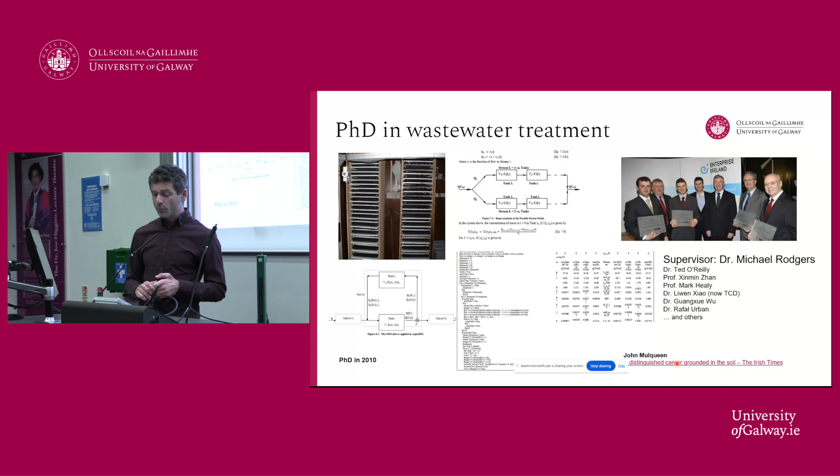I'd also like to mention John Mulqueen, who worked with us in the lab, had a long research career with Michael, and was also a brilliant person. So I was really lucky in this group. He died a number of years ago, but was a soil scientist with a vast international career.

Okay, so I'm skipping ahead a few years to university life. I suppose the question is, why water, wastewater and sanitation - why is it an area of interest? To be honest, all engineering is of interest to me, but currently as of 2022, the most recent data, there's just over 2.2 billion people who don't have safely managed water. Far more people have access to mobile phones and the internet than have access to clean water, which is astonishing. And 3.5 billion people lack safely managed sanitation around the world.

And it's not just in developing countries, it's in developed countries as well. It's the leading cause of death for children under the age of 5, and the leading cause of malnutrition for children under the age of 5 - lack of sanitation facilities.

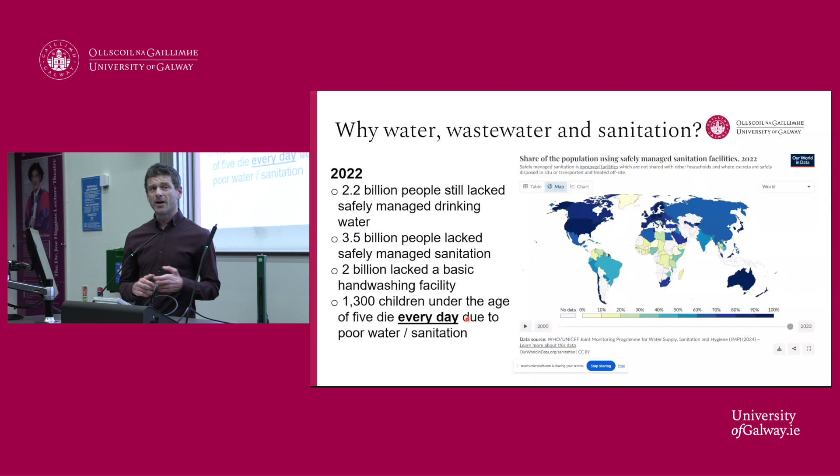So for me, it's always been an area of interest, and even in developed countries there are significant problems with water and wastewater treatment - problems such as the costs of maintaining the infrastructure, the energy consumption that goes with trying to treat wastewater and water, which I think a lot of society are not really aware of.

The types of contaminants that have to be removed - basically everything that goes down the sink and down the toilet has to be somehow taken out of the wastewater treatment plant. That includes cosmetics, pharmaceuticals, all the other products that end up in the system.

Wastewater infrastructure is now challenged by climate. Additional rainfall gets into the wastewater treatment plants, which could have significant impacts, and there's lots of other areas.

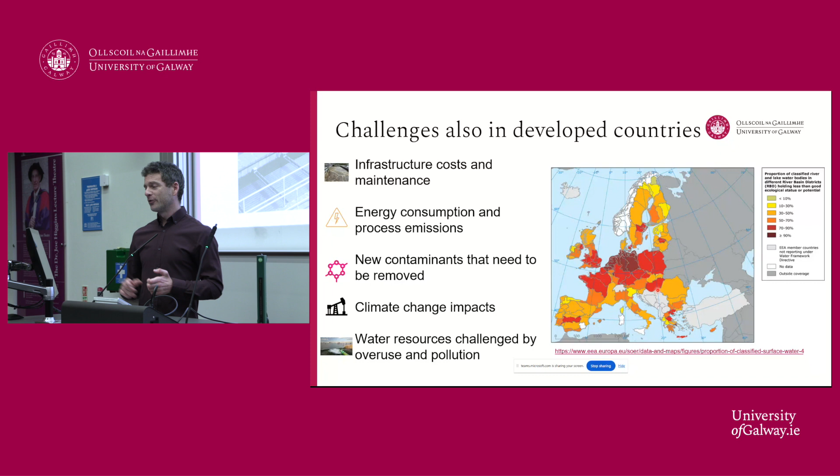I was quite lucky - the head of Irish Water did me a favour last week by coming out with a pretty bold statement saying that the system in Ireland is in a desperate state. I don't know if anyone read that, but it was pretty critical, I felt, of the government in terms of their approach, and maybe of society in general, to water infrastructure. So it was quite lucky for me to have this presentation, but I can see why they might think that.

So that's kind of the context. The two areas that I'm going to focus on, with a few detours along the way, are aeration and process control. I'll describe these very briefly, not going into technical detail in this talk, but they're the two core themes that our research has focused on over the last number of years.

So aeration, it's quite a simple thing actually. In order to drive wastewater treatment, we need to get air into the water. The air enables the bacteria we use for wastewater treatment to carry out various reactions, and those reactions are what we use to remove a lot of the contaminants from wastewater. So it's really the key driver in wastewater treatment, but it's also the key energy consumer, and it's the key component we use to try and control how well the treatment process works.

There are different technologies we can use, such as surface aeration. It's nice engineering technology, I think, because it's really simple. It just comprises sloshing the water around the place to create turbulence, which helps air get in. It's very robust, actually quite efficient, but very robust, doesn't break down.

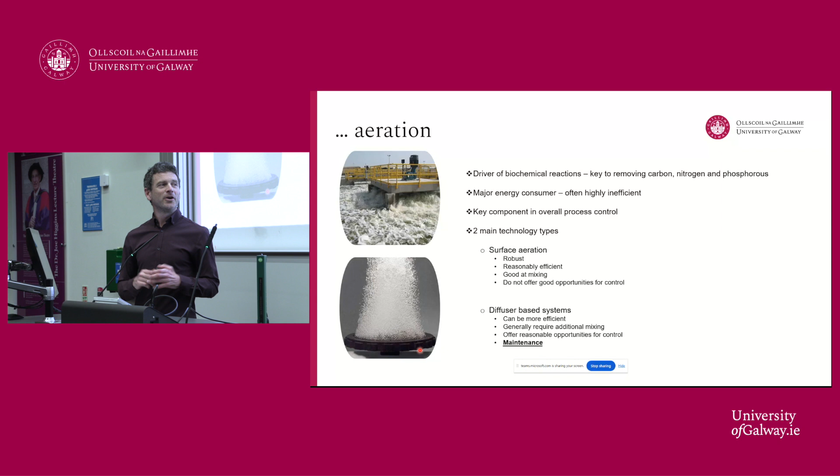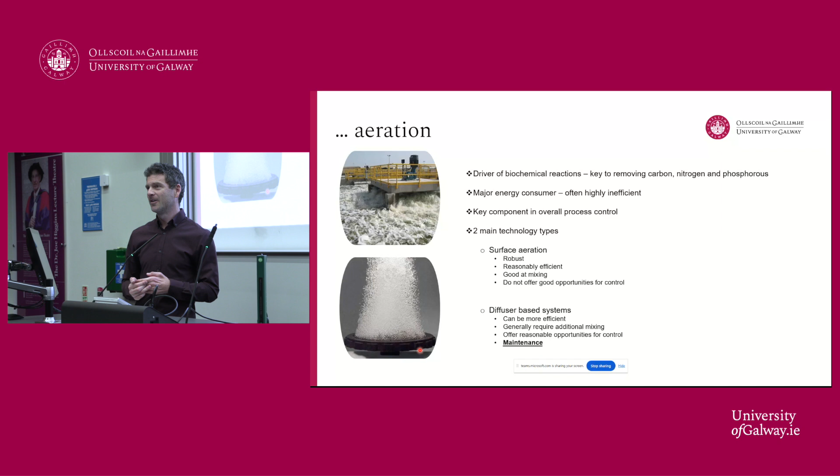Maintenance of these is a major problem, because most people haven't seen a wastewater treatment plant, but a tank would easily be the size of this room, or multiples of that. If you have diffusers on the floor at the bottom of the tank and they start getting clogged, how do you maintain them? What do you do with the millions and millions of litres of wastewater already in the tank? There's wastewater coming into the system all the time, you just can't tell the city to stop producing wastewater. So the maintenance of these devices is a major problem.

The other problem we try to tackle is this kind of performance gap. These technologies work very well when applied to clean water, but because of different chemicals, including household detergents that we put into wastewater, these technologies tend to perform much more poorly in wastewater when compared to clean water. That makes them less efficient and causes us to spend more money on aeration and other issues.

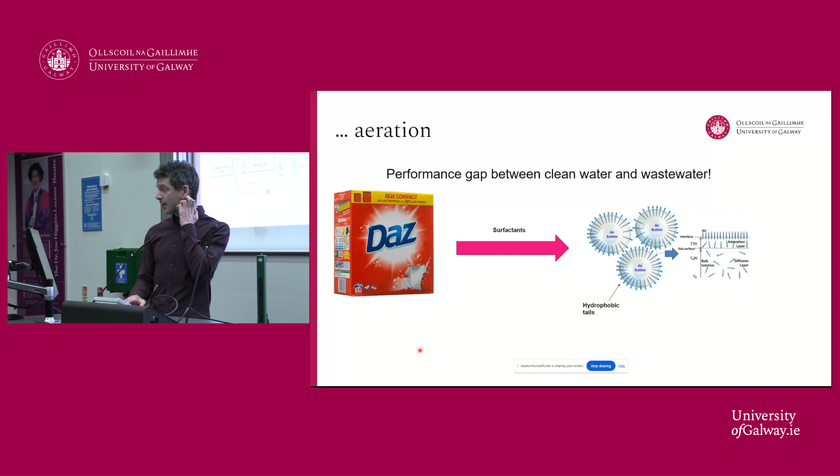So that's the first area, aeration. The second bit is process control - how do we control the overall wastewater treatment process so that we meet the discharge limit.

Every wastewater treatment plant has to meet a discharge limit, a regulatory limit, which in Ireland is monitored by the Environmental Protection Agency. It has to be as efficient cost-wise as possible, because while Irish Water are complaining they don't have enough money, so is every utility around the world, so they have to try and drive down costs.

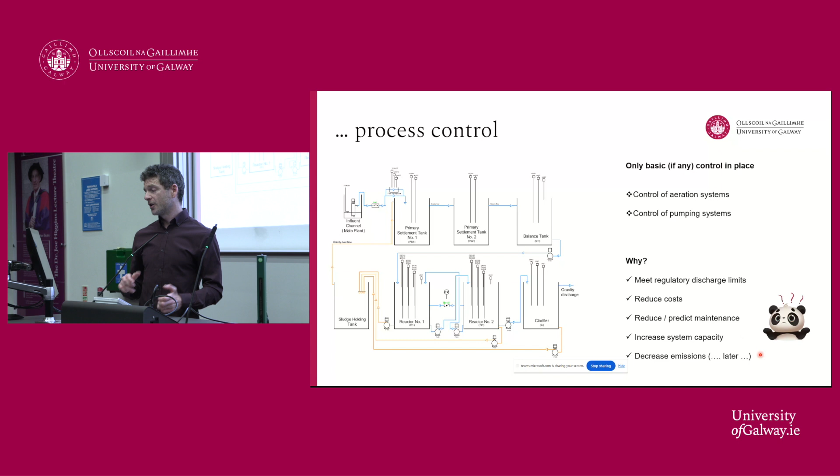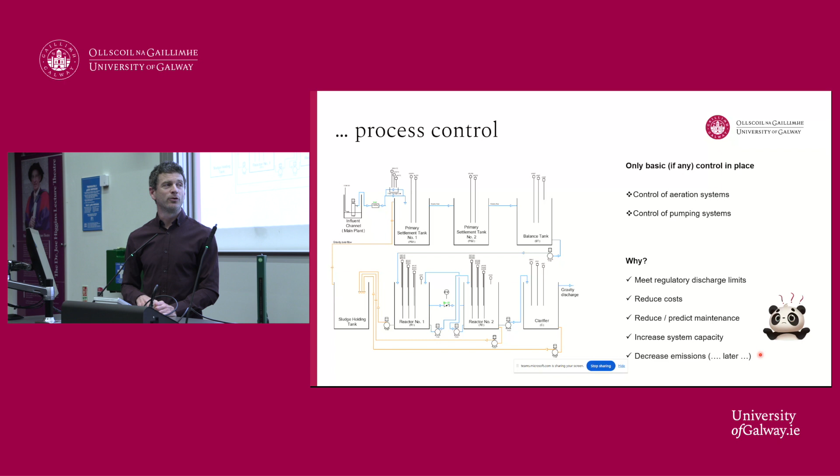These types of control systems can try to reduce or predict maintenance so the plant doesn't break down, allowing maintenance before a system breaks down completely. They can be used to increase system capacity within the same volume or infrastructure footprint. And later, we'll see how we can use process control to try and reduce gaseous emissions from treatment plants. So these are the two main areas I'll run through, with some detours into other research projects along the way.

Okay, so the starting point in my work, as I mentioned, was my PhD, and it was the development of this system called a horizontal flow biofilm reactor. I developed it in the lab and did some site trials.

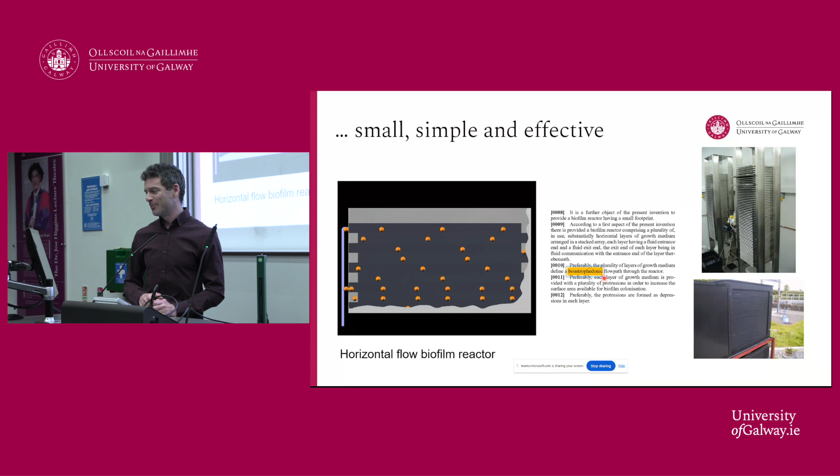When we developed a patent on it, one of the nice phrases I learned was 'boustrophedonic', which is this type of flow in a particular unit. I'd never heard of that word before, but it fit nicely into our patent, and it was actually one of the two things that allowed us to get a patent - using that word, which I know is crazy, but when you get into patenting, you see that really small things make a big difference.

So we developed this technology, and why did we develop it? Well, the first thing was that the way we delivered air in this technology was passive. We didn't force it in using any mechanical mechanism. We did some little tricks with hydraulic flow, with how the wastewater flowed through the system, and that enabled air just to basically be driven in naturally. So there's no mechanical parts to aerate this technology.

It required a pump, but we also set up systems that required no electricity as well, using basic tipping buckets. The systems required very little maintenance. If you basically don't have any electrical or mechanical parts, then there's very little that can go wrong with systems like this. And we could use it to remove nitrogen, which is a contaminant that's very tricky to remove.

One of the nice selling points of this technology was that it might cost in running costs between 0 and 20 euros per year, depending on the topography of your own site. Of course, like every technology, it had disadvantages, such as the cost of plastics and manufacturability, because of the way we had arranged the sheets in it, and it was only useful for very small scale applications.

So we did commercialize the technology. It had some success, but the cost issues at commercial scale were a problem for it. But it was actually a great technology for teaching in wastewater, and we were able to do some really nice PhD work using the same system to treat gaseous emissions from wastewater treatment systems as well. I'll mention Colin Kennelly and Sean Garrett, who did PhDs in that area.

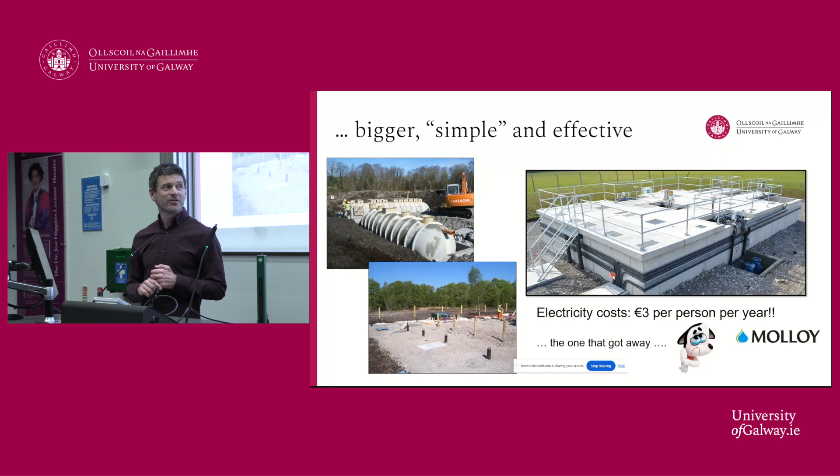But if we had some moderate commercial success with it, probably not as much as I feel we could have. So, technology with loads of different advantages.

One of the nice things about this technology was that the way we were aerating the system had never been modelled before.

So with Noelle Jones, we did a PhD - she now works in ATU - on how to develop new biochemical and hydrological models to model this particular type of treatment technology. We had really nice collaboration with Hydromantis, a Canadian company, as part of this project, who I still collaborate with in wastewater modeling.

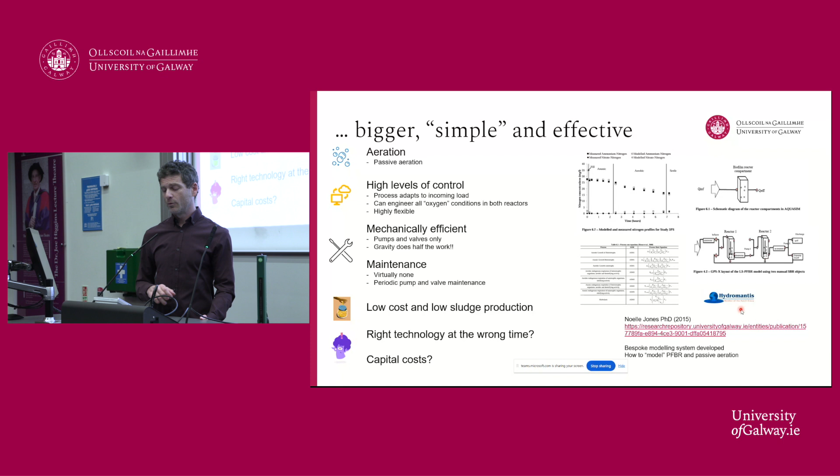While all that was going on, with my colleague Ted O'Reilly, we also built a research facility out in Tuam, and should give huge credit to Michael Rodgers, who was here from the start of this process.

This treatment facility is still out in Tuam, and basically it was a wastewater treatment plant designed to allow industry to test different and new technologies in wastewater treatment.

Up until then, if you tried to test a new technology, there was a problem in Ireland because you had to sign off that your technology would not disrupt the existing treatment plant. We developed this research facility, which was not subject to any discharge limits, because we were taking wastewater from a large facility and pumping it back into the same facility.

At that site, we tested maybe 30 or 40 different companies' various technologies, devices, sensors, a whole raft of different suites. We also used it as a demonstration site for the technologies we were developing ourselves. So it proved really successful.

We also designed and built a remote monitoring unit that could be brought around to different treatment plants around the country to monitor in real time how those treatment plants were performing.

Okay, just a quick detour into some other areas of research before we go back to this. In the area of aquaculture, to be honest, I don't know anything about fish or the biology or ecology of fish. But from an engineering point of view, an aquaculture facility is like a different type of wastewater or water treatment plant - instead of growing bacteria, you're growing fish, but a lot of the same principles apply.

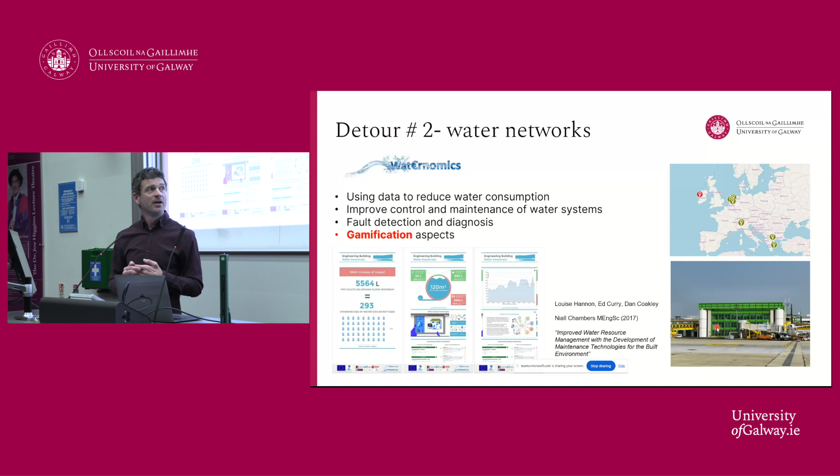And the project also developed a number of gamification aspects which would allow us to help end users, such as in schools, houses, or in airports, an airport in Milan, because that was one of our trial sites, Linate Airport. Thessaloniki in Greece was a city that we used as part of the trial, and then we had trial sites here. So how do we get people to engage with water consumption and engage with water sustainability?

So I see Louise Hannon here, so she might have nightmares about this project.

So kind of taking some of what we learned there, we applied it to the energy sector, through a project called Emerge. Again, that was a project we coordinated here. This project was really nice, really interesting one. Not in the area of water, but we were trying to apply some of those techniques to how energy is consumed in schools. So the project involved 13 schools across 6 countries. It was a very interesting project that combined data science, engineering, and social and behavioral sciences, and a lot of working with students during the project.

Unfortunately, we did it at the worst possible time, because of all the places to work during COVID, schools were the worst, because they closed down. Of course, when your demonstration sites are schools, and all the schools across Europe closed down for long periods of time, and even after they opened up, they didn't want anyone external coming near them. They also didn't want additional digital interaction for the students, because that was an alternative. We could have tried to do some of the work online with the students, which we did do, but of course they were getting all their lessons online, and the schools were telling us, look, you can't add more online stuff to this, it's challenging enough as it is.

But in the end, actually, we got through it, and I think, given all the circumstances, probably the worst possible circumstances, we came out with some really nice work. There are some papers hopefully to be published on that later this year, plus a PhD thesis, which will hopefully be finished this year with Raquel Lima.

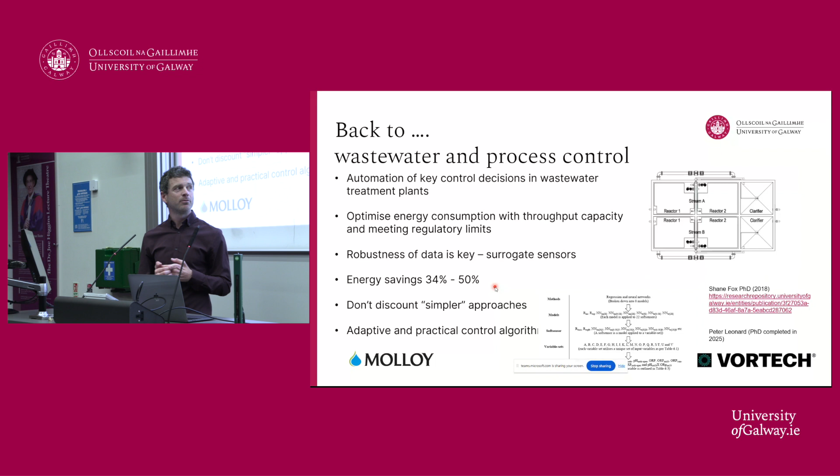We developed 2 PhD projects, one completed this year and submitted, and one in 2018, with some other work in this area on the way. We developed a suite of tools and methodologies which we tested in large, real wastewater treatment plants, allowing us to optimize these 3 approaches. In Shane's particular thesis, when we applied these methodologies to a number of small to medium-sized treatment plants, the energy savings were between 34 and 50%, so enormous energy savings, while still meeting regulatory limits.

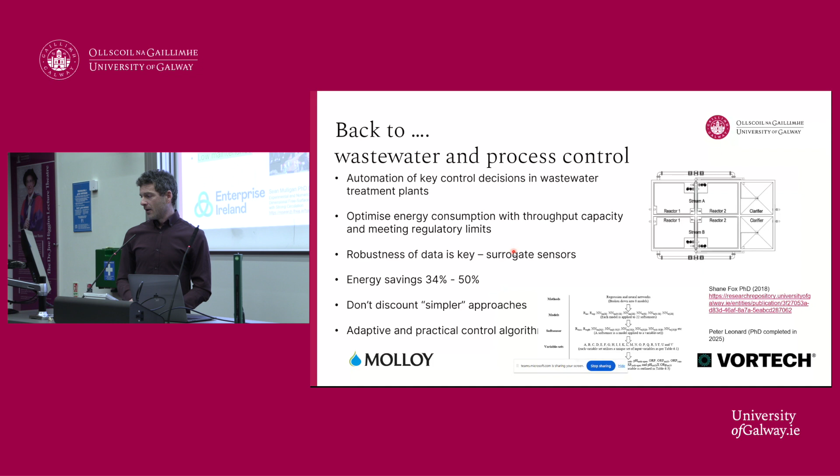Moving on to Vortech, which Leisha mentioned in the introduction. This has been the most successful commercial venture we have had to date. It goes back to this whole thing of aeration.

Can we develop a way of aerating wastewater that would be passive, not forcing air into water? So we developed a vortex-based system. There should be a video playing to show how the system works, but it's not coming up automatically, so apologies. We developed a system which extracts wastewater from the treatment system and pumps it through a cylindrical shaped object.

We don't give out drawings of the shape of the object because the patent could easily be broken. What happens is we establish a certain water and fluid velocity in the system, which creates a vortex in the center and sucks air down through the system. You get this highly aerated mixture of air and water, which is pumped up, circulated at high speed, and driven down into the wastewater treatment tank.

That's the mechanism by which we create aeration, but we also create mixing at the same time. It's quite a complex fluid dynamics principle to get right geometrically, but it's actually a very simple application - you just need one pump and a nice looking system like that. It allows us to control aeration and mixing.

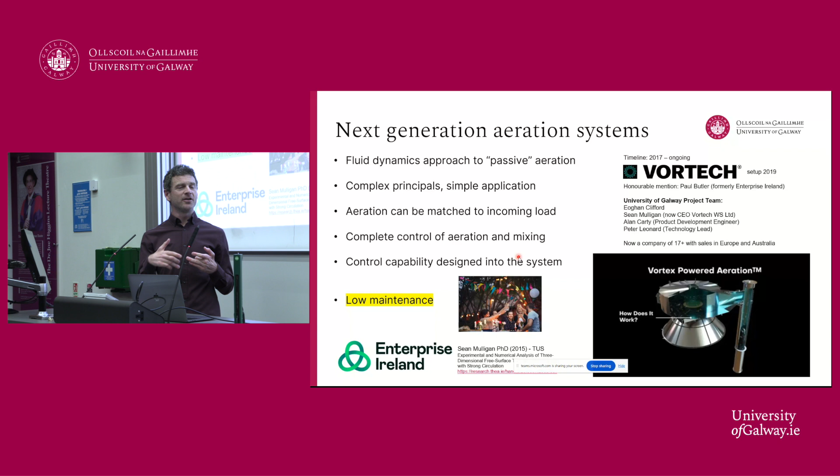One of the problems with existing aeration technologies is they're not easy to control - you can't easily turn up the aeration and turn it back down again or stop it. And when you're stopping it, you might not be able to mix at the same time, which is very important. This technology allows us to do all those things, and it's also very low maintenance.

I should acknowledge a lot of the fundamental fluid dynamics work was carried out as part of a PhD of Sean Mulligan, at TUS in Sligo. Enterprise Ireland funded this project, and I have to give a lot of credit as well to Paul Butler from Enterprise Ireland, who helped us both in getting the funding to drive this forward and giving us a lot of commercial advice along the way.

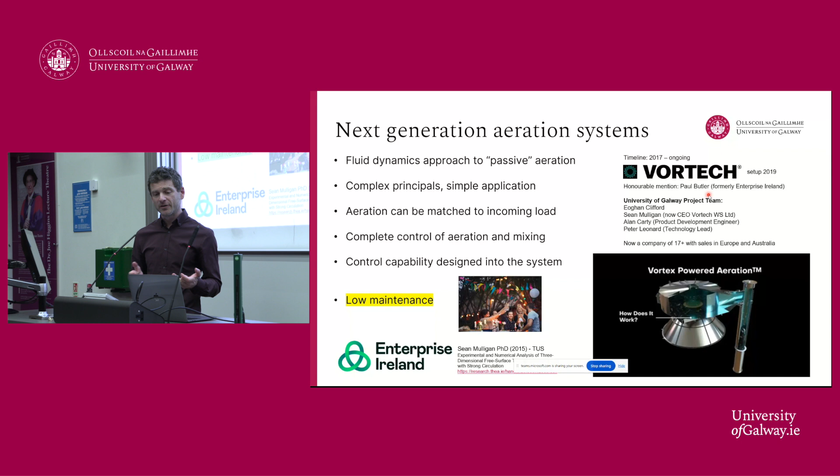The system in practice - Vortech is now a company based in Galway, selling technologies across different countries. These are large-scale units when applied in practice, up to 4 meters in diameter, and the only limitation on their size is actually logistical issues such as shipping and trucking.

Our first supporters were Irish companies that allowed us to demonstrate the technology, Ward & Burke and ABP. The company is expanding at the moment, and we currently have signed a big contract in Australia to provide technology to a utility over there, plus hopefully others in the pipeline, so it's quite exciting.

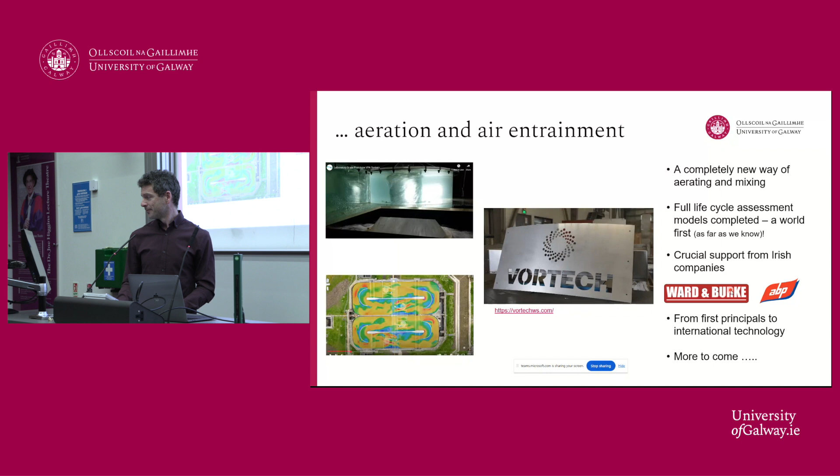Another really exciting project in the area of air entrainment and infrastructure - you can actually see both the last unit and this particular system I'm going to describe in our engineering laboratories here.

You may know that London's sewer system is very old, and over the last number of years they've been constructing a new sewer system. Prior to its construction, about 18 million metres cubed of untreated sewage was going into the Thames every year. I still probably wouldn't swim in there, but it's probably better than it was before.

One particular area of concern was an area in London called Putney Bridge. There's an old historic bridge there that underneath had these what are called CSOs - overflow places where sewage can overflow into the river. They wanted to capture this overflow, but they had to do it without touching the bridge, because the bridge is historically designated.

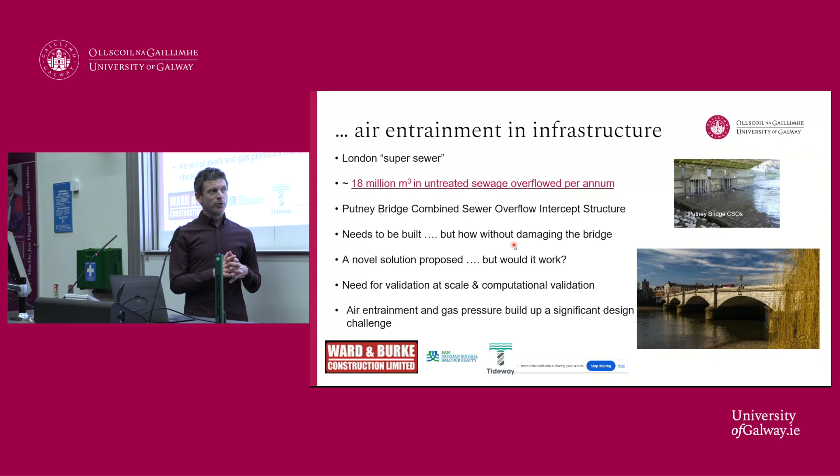The problem was that the existing solution, proposed by an international engineering company which I won't name, wouldn't have worked. It couldn't be built without doing damage to the bridge. Ward & Burke, a local construction company here in Kilcolgan, had an idea as to how it might be done differently, but they had to demonstrate that their solution would work. So they came to us to develop both computational models and a scale model, so we could test whether their solution would work and make any necessary changes.

A big design challenge that resulted in a lot of changes was an issue of air and gas pressure. In sewer systems, we cannot allow air and gas pressure to build up, because it can cause what you might see as geysering from the sewer systems. This was a particular challenge at this location.

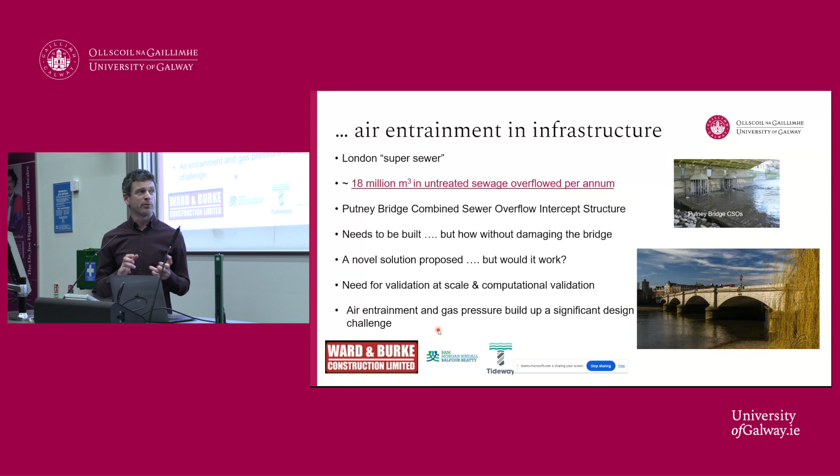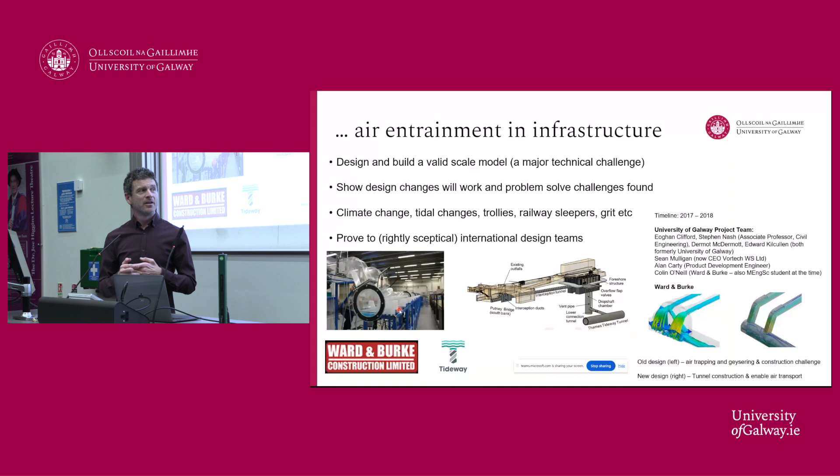So we built a 15-meter long scale model, and the design of that model is one of the most complex engineering things we've done, because it had to be precise. In order to replicate what would happen on site, the scale had to be very accurately done. We basically developed a new way of intercepting the wastewater underneath the bridge that would allow Ward & Burke to tunnel towards the bridge instead of having to dig around it, which they did do, and we were able to demonstrate that the solution would work.

It was quite nerve-wracking, because we had international design teams from some of the biggest engineering companies in the world coming over to test our solution and see that it actually did work. So that was a really fantastic project.

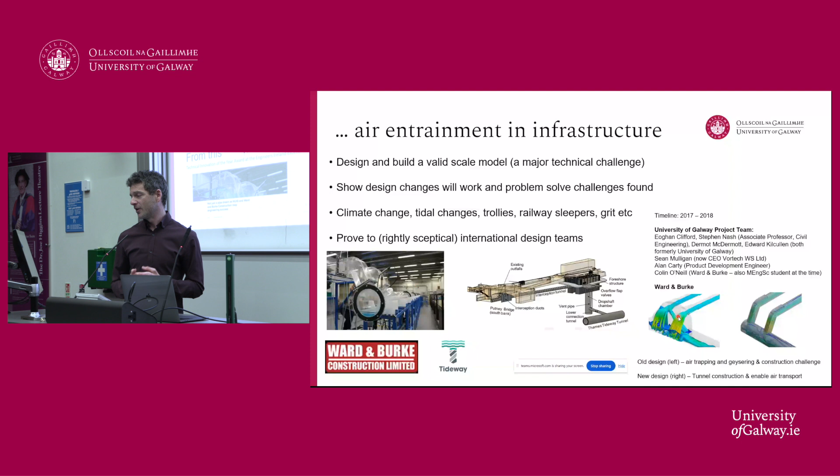Okay, just a brief detour. Other work we've done has been in the area of wastewater disinfection, which is an area of great interest to me. Killing pathogens and bacteria in wastewater and water is essential, as I'm sure everyone realizes, but it's actually very difficult. Kelly Fitzhenry carried out a really challenging PhD in wastewater and water disinfection, using what's called pulsed UV technology.

One of the other ideas we had was a treatment technology that would capture gases produced during wastewater treatment and treat them in the same technology as the wastewater. My first PhD graduate, Paul Ford, did his PhD in this. It actually worked brilliantly. The problem was that when we built it and tried it on site, after about a year of applying suction pressures on and off, the whole thing collapsed like a can of Coke. We came outside one day and our whole system had collapsed.

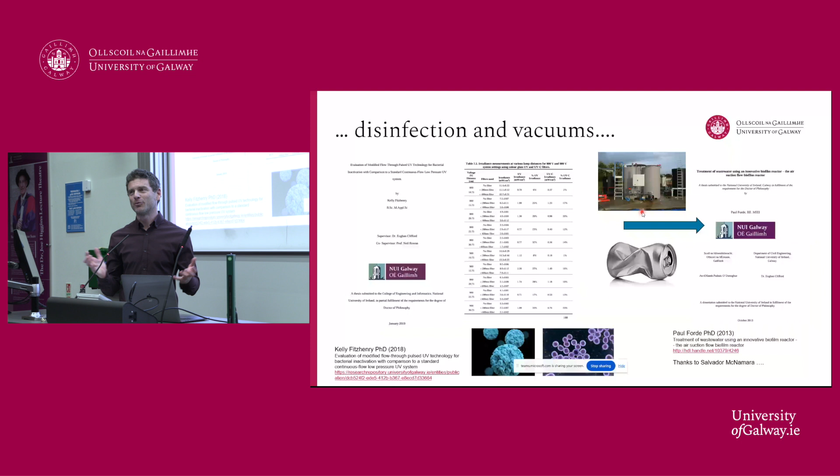When we redesigned it to have a 20-25 year lifespan, the costs were just too great, so the technology was never viable. But it was a really nice PhD project. And yeah, that's what engineering is about - you make mistakes.

Other areas of work we've carried out are in sand filtration for water and wastewater treatment - really simple technology. I've collaborated a lot with colleagues in microbiology just to understand the mechanisms by which we can remove various contaminants using sand filtration. I've also done some work in geotechnics with colleagues of mine, Brian McCabe and Jamie Goggins.

So we're getting close to the end now, for those who might be getting bored.

Probably one of the nicest projects worked on over the years is a project called Inaqua. This was a sanitation-based project using, believe it or not, worm-based sanitation - treatment technologies that leverage worms to actually remove wastewater. There were other technologies used as part of this project, but I'm not going to go into those.

This was funded by Horizon 2020, and it was led by Novatech, with myself and my colleagues Louise, Alex, and James working on it. We were kind of technical directors of the entire project, which was quite complex because there were demonstration sites across the world, from Tanzania to India, Turkey, Romania, France, Spain, Peru, Ecuador, Scotland, and Ireland - I think that's all of them.

So a lot of moving parts in this particular project. The idea was to introduce this technology plus other technologies and demonstrate them in various locations around the world, to see how they would work in different climates, particularly in areas where you don't have access to electricity, flushing toilets and things like that. It was a very nice and complex project, I could do hours talking about it.

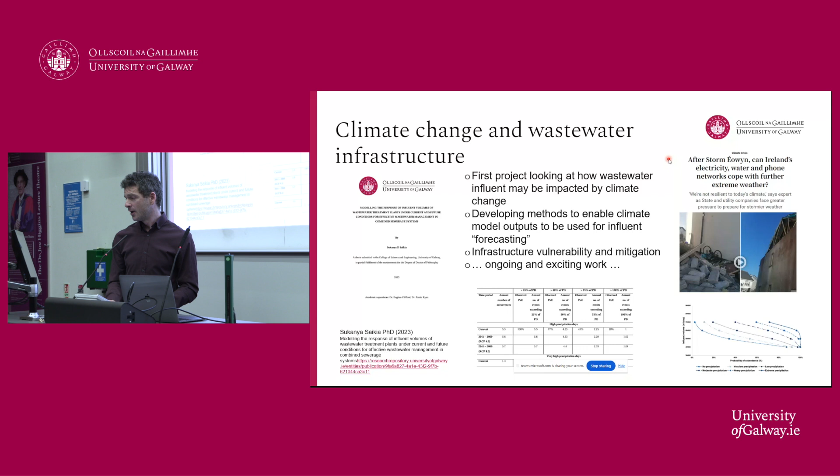An area I think is really exciting that we're working on at the moment is climate change and wastewater infrastructure. One of the big things that's going to impact our storm networks and sewer networks into the future is rainfall patterns. We're developing - and I think we're the first people to do this for wastewater influent - models that will enable us to link climate change predictions to how they will impact our sewer networks, and particularly our wastewater treatment plant influent volumes into the future. I won't go into details, but that's exciting work which we have published on, and there will be more to come.

Okay, so the last thing then is in the area of cycling. I also do some research in the area of cycling.

We were lucky enough to live in the Netherlands in 2023, and this is what cycling looks like there. You don't have to dress up as if you're going to battle, you just go out and cycle your bike, because everyone just gets on their bike over there. Secondary schools have hundreds of bikes, kids are never brought to school by car. It doesn't matter if it's snowing, raining, storm, whatever, they all cycle. The thing I remember most from our stay in Eindhoven is seeing gangs of teenagers, like 50 or 60 cycling together to school in the morning and home in the evening. It's just fantastic, so we do some research in the area of cycling.

Ireland has a transport problem, I think everyone knows that. I have a particular focus on cycling and public transport when it comes to teaching, and some of the projects we've done are in the area of greenway design. You're probably all familiar with the Great Western Greenway, and there's greenways now in Limerick and Waterford and various places. We've done a lot of work on how these should be properly designed.

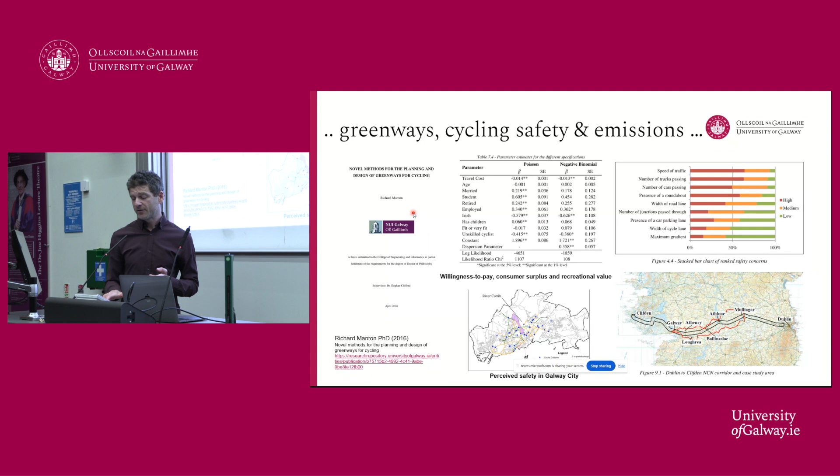How do you go about the route selection of these greenways? What are the safety concerns that cyclists have in relation to both greenway design and other cycling network design, and how the building of these greenways and cycling networks can impact emissions - transport being one of our most challenging areas when it comes to emissions.

Other areas that we look at are emissions. I've led the calculation over the last number of years - the university is obliged to report what's called Scope 3 emissions.

Amongst those are the emissions resulting from people commuting to campus. In our group, we've calculated those emissions from the start of them being measured, and currently we're handing that over to the Director of Sustainability, a former PhD student of mine, Richard Manton. There's also a really nice master's project at the moment in pavement design for greenways - how can we design the pavement structure to make cycle networks and greenways much more comfortable? Might sound quite simple, but it's actually a really interesting project.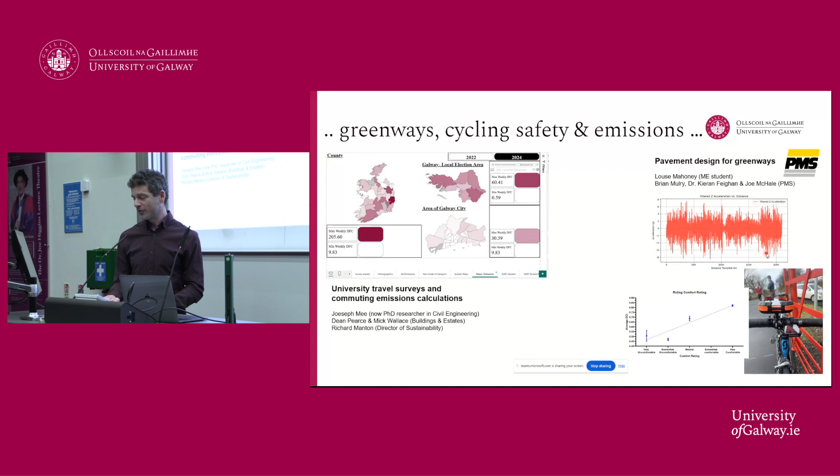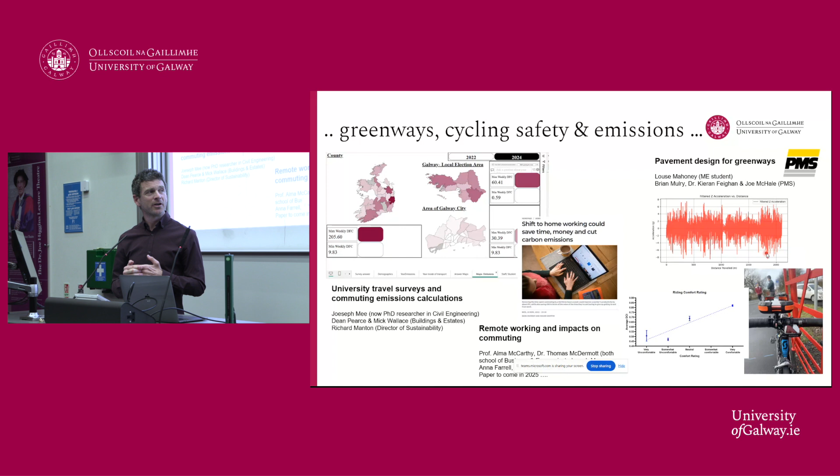I also collaborated with some colleagues in the School of Business and Economics on the types of impacts that remote working could have on emissions and other economic factors. I'm hopeful that work will come out later this year.

One of my favourite projects is in aerodynamics. I knew a lot about cycling but didn't know much about aerodynamics before we started this project, but we were lucky enough to form a collaboration with the Technical University of Eindhoven and Professor Bert Blocken. This project involved myself, Bert, Magda, and Thomas Andrianne from the University of Liège. We were the first people to look at the aerodynamics of Paralympic cyclists, which you may think was trivial, but it's actually really, really technically challenging from an engineering point of view. Non-Paralympic athletes over the years have had so much sports science applied to them - our idea was, why not apply this to Paralympic athletes?

A lot of techniques used to model the aerodynamics of Paralympic cyclists were just taken from non-Paralympic cyclists and applied to them, but we found that for various types of bicycles, these rules did not apply at all.

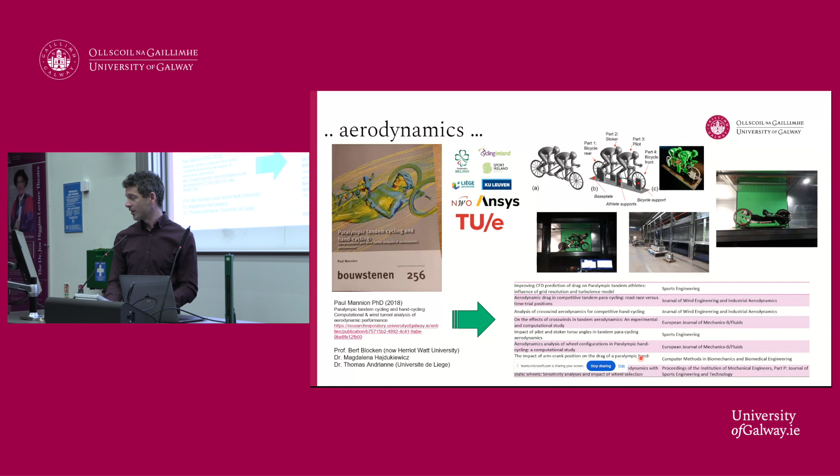This project resulted in 8 papers during one PhD, which was pretty astonishing, and it was just a really cool area of work. There was both wind tunnel testing, computational fluid dynamics testing, and some really nice collaborations with different partners across Europe. And then finally, obviously, you have to apply some of these in real life.

I spent a bit of time cycling myself, including in Rio. Aerodynamics comes into play when you're trying to go for medals in World Championships, Olympics or Paralympics - the difference between first and fourth could be 0.4 of a second. So if the seam on your jersey is out of place, that could literally lose you a medal. There are a lot of nice memories from Rio.

One of the memories I have is of the security in Rio - how overwhelming it was. They literally had, it seemed like, the entire army there, and yet how friendly it was.

Before we went to Rio, we were training in a place called Uberlandia, near Sao Paulo. The police were a bit concerned for our safety there, so we had police escorts all around the place, which meant we could go as fast as we wanted, basically, because they kept the traffic away from us. It was just really fantastic, and it was nice to actually link some of the research I was doing and put it into practice myself.